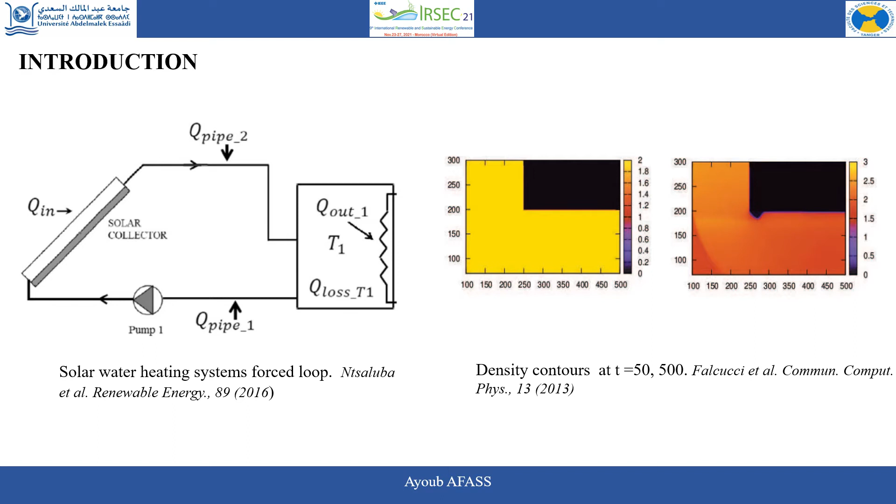In the most high-efficient solar water heating systems, the pump is often a fundamental component. Although it's a reliable tool to control the forced flow, its weakness to induce cavitation is a real issue. Cavitation is an undesired phenomenon. It reduces pump performance by generating shock waves that can even destroy the pipeline.

To grasp the effect of cavitation on the flow and the density field, this work presents a preliminary study on bubble cavitation induced by gravity and lid-driven flow using the pseudo-potential lattice-Boltzmann method. Hence, the physical model is a square cavity filled with saturated water at 0.9 temperature of the critical state. The fluid is under a gravitational acceleration of 5 times 10 to the power of -5, while the lid-driven flow is defined by a Reynolds number of 200, and the working liquid is assumed to be Newtonian and incompressible.

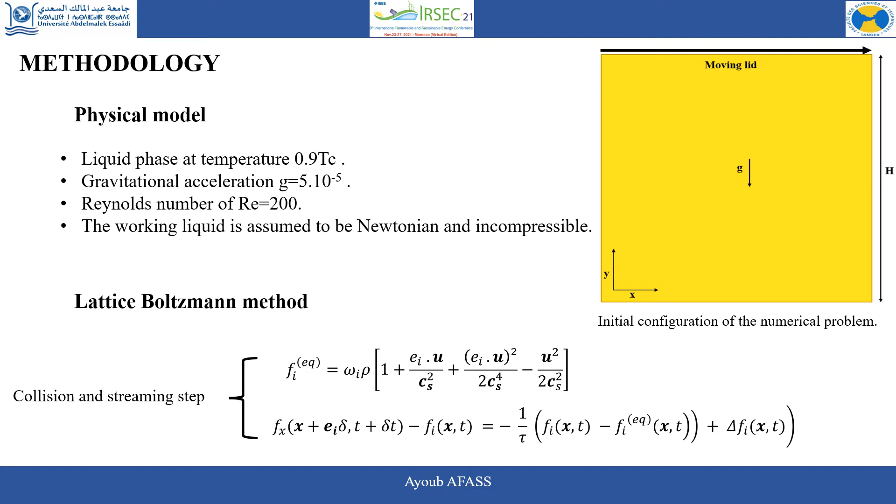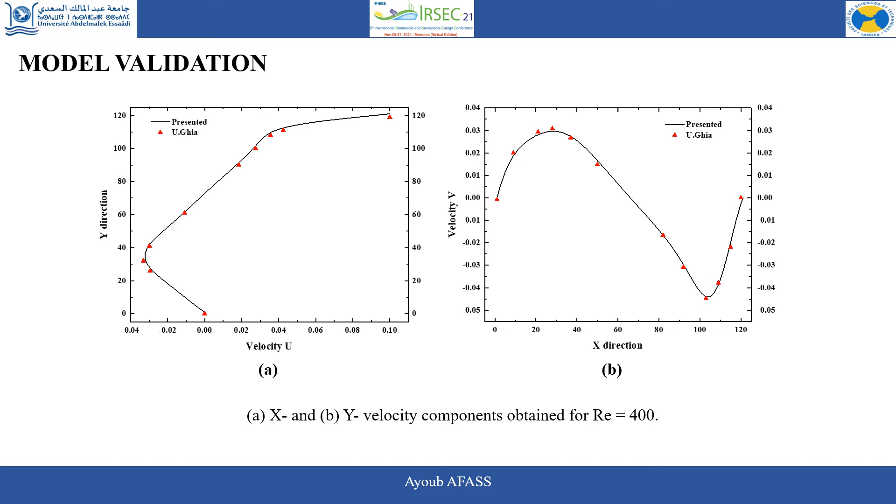To validate the home code, the first step was to check it via the lid-driven flow test. The two figures present the velocity magnitude on the central axis. It can be seen that the presented result is in agreement with those presented in the literature.

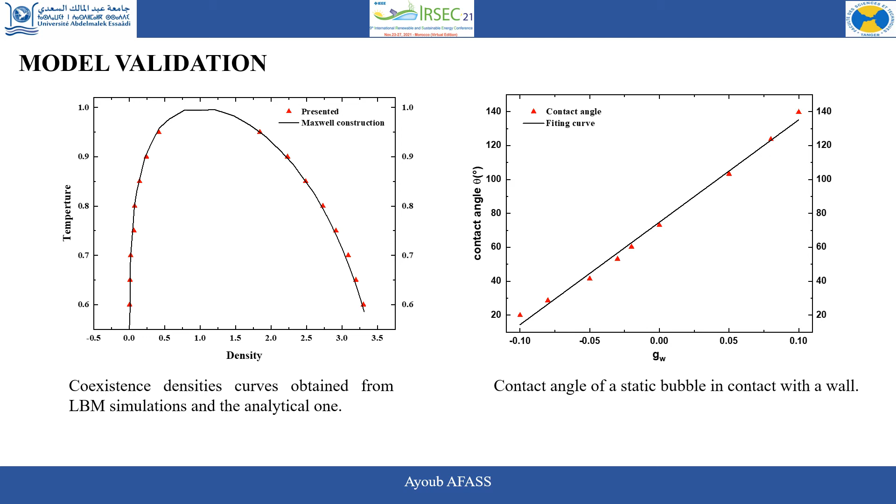To end the validation stage, we check the adhesive behavior of a bubble in contact with a wall. As the results show, our model is able to simulate a wide range of contact angles. After checking the home code validation, we can proceed with the results.

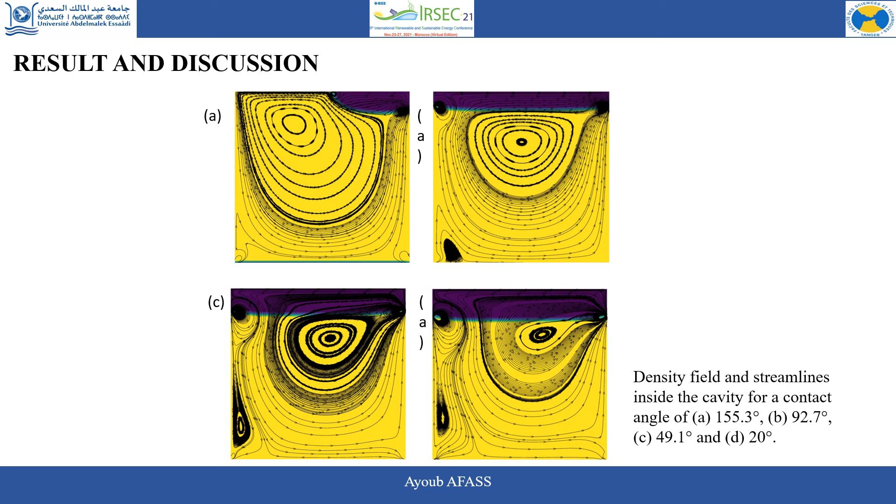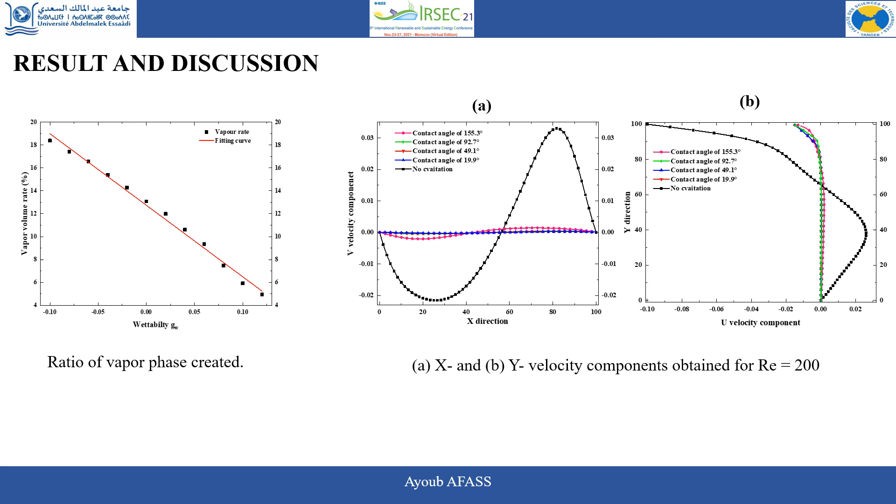In the end, we can conclude that the effect of wettability is studied, finding a linear correlation between the fraction of generated vapor phase and the wettability condition of the wall. Also, the presence of cavitation massively reduced the velocity across the domain.